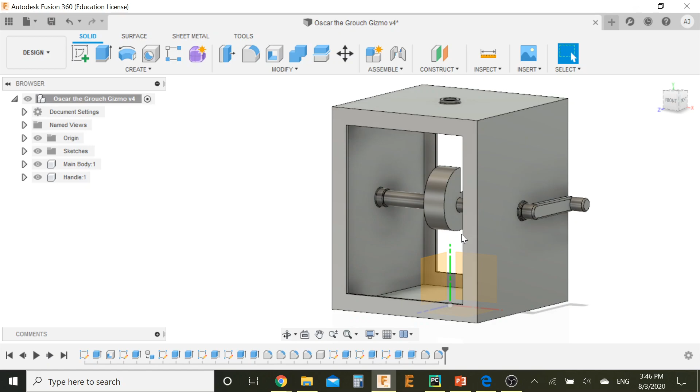As we saw in the last tutorial, we made the main body and completed this lever here, basically this shaft thing. How this is going to work is like a crank: when we turn this anti-clockwise, this thing's going to move anti-clockwise, and the shaft we're building today lies over here. That's going to rotate, and because this increases in radius, the shaft slowly moves upwards. The shaft is connected to a head that pushes open a garbage can, the head peeps out, and as soon as it reaches the top, it quickly falls back to the bottom again. I think you get what I'm saying.

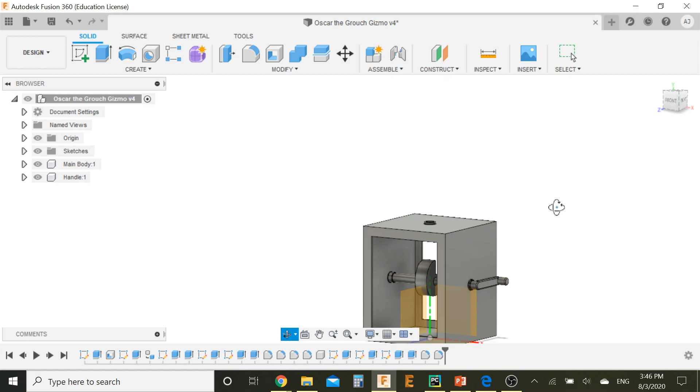So let's actually start building this. First thing, let's go to the top. This needs to look like a cylinder with a radius of 3.75 millimeters and a height of 120 millimeters. So let's work with those dimensions and see what happens.

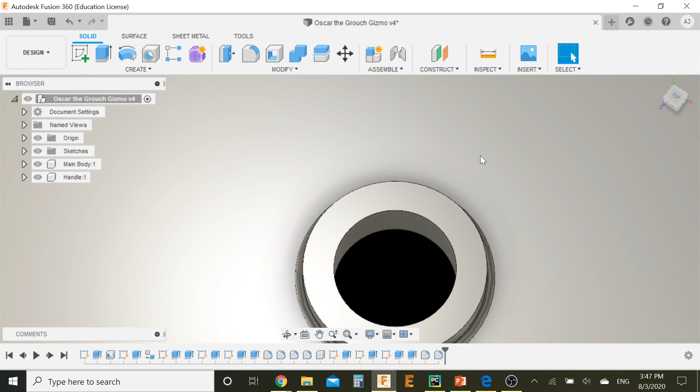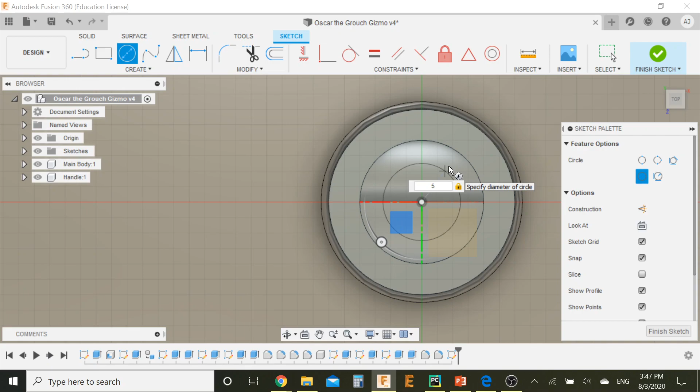Let's click on this part and create a sketch over here, top view please. Now we need to make it right in the center of this. I'm going to hit C on my keyboard to make a circle. Let's make it 7... no, 7.5, sorry, it's 3.75, so that's 7.5 millimeters diameter. Yeah, there's a circle.

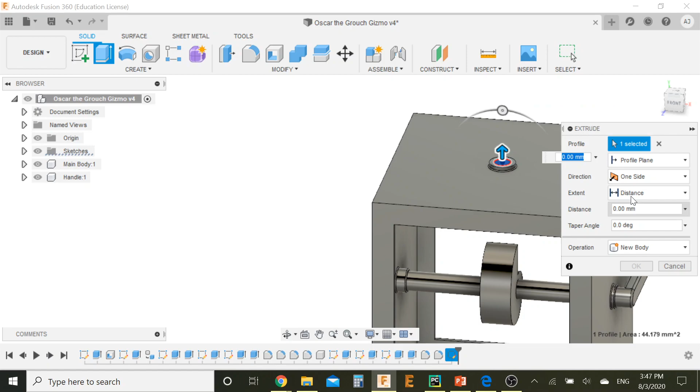Let's extrude this. Hit E on my keyboard, select the circle. Now I want this to come down and go all the way up again, so I'm going to make this 2 sides, and drag this one down.

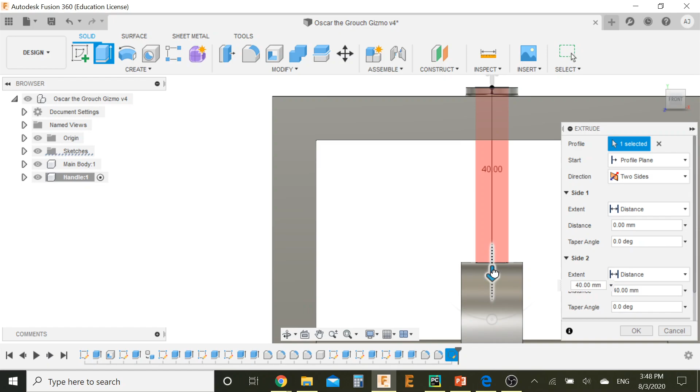There it is, front view, let's make it easier to see. I want to drag it as far down as possible, but not too far, so it's looking at 39... let me do a little more... yeah, exactly 39.9, I hit it, so 39.8. That's fine, I'm not using exact measurements here, I'll just adjust it further. If that is 39.8 and I need 120, then I need to move this thing up 80.2 millimeters.

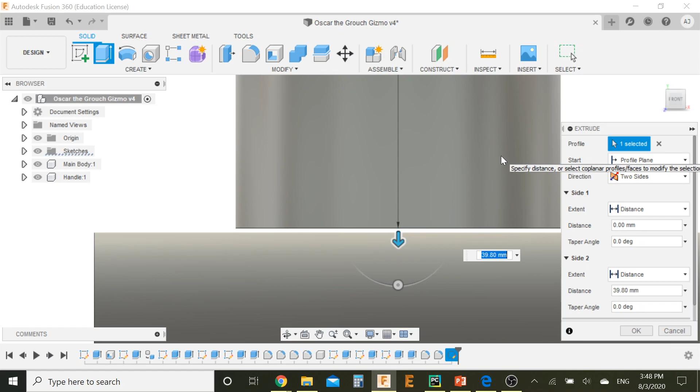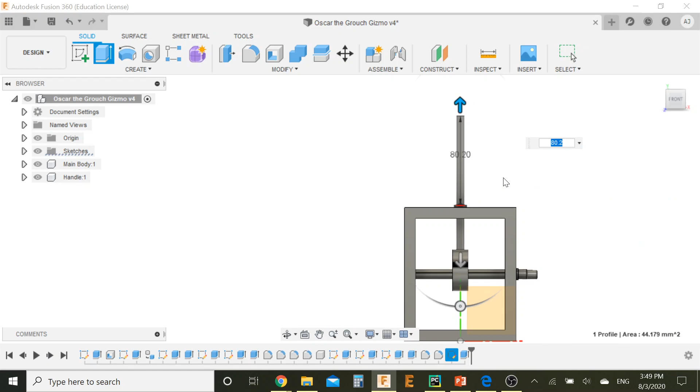Let's zoom back out and use this side here, and let's move this 80.2... yeah, 80.2, that's looking all right. Let's hit enter. Perfect, and that's the shaft.

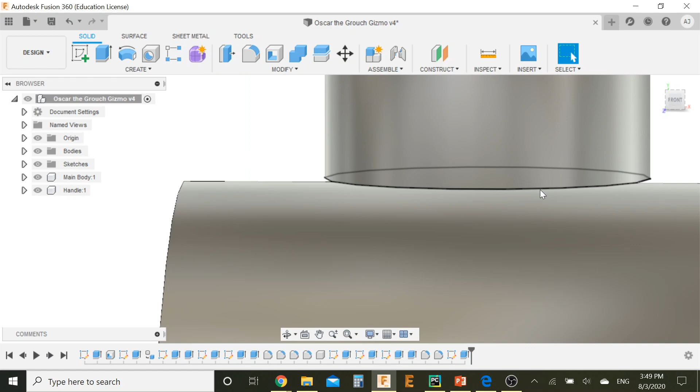The top can remain as is because we're going to put another head on top of that, so that's fine. The bottom over here, because that's in view, we might want to make this a little better, so let's create a fillet. Hit F on your keyboard for a fillet and select this edge, and let's go 3.75. That gives us a nice rounded edge like that. Hit OK, yeah, perfect.

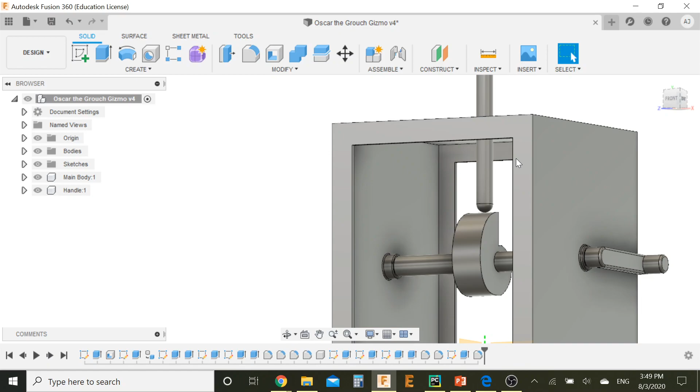There's our shaft complete, and then we can just add some joints to this in the next tutorial. Right now, I want to make this into a separate component, this shaft over here.

Let's do that. I'm going to go to bodies, that's what I just created, this body over here. So what I'm going to do is right click on this body, create components from bodies, create that component, click on it multiple times so you can rename it, and I'm just going to say shaft. Enter, perfect, that's it. Now you can see this is a component because I can just move it around.